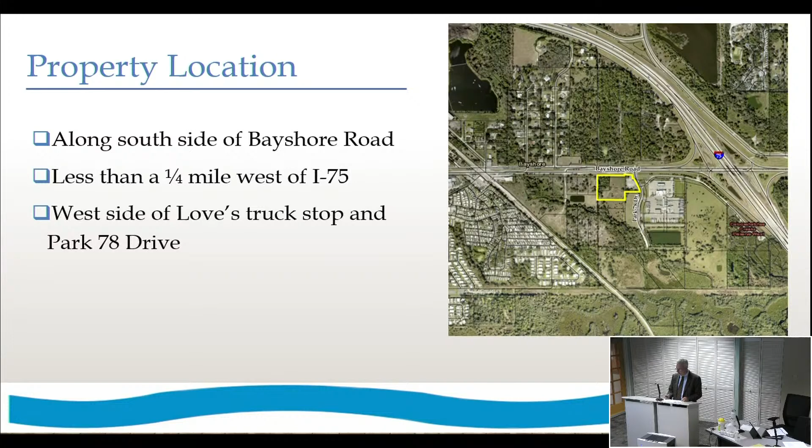So the property is located right at the southwest quadrant of I-75 and Bayshore Road, State Road 78, right here. You can see this is the big Love's truck stop, and this is the subject property. To the north here is a commercial planned development that I believe was zoned sometime around the 2010 timeframe. We did that zoning as well, and it's for all commercial development at the interchange. The property itself is 5.29 acres.

The proposal is for a convenience store with fuel pumps, similar to the use just to the east. 6,000 square foot convenience store with a total of 22 fuel pumps.

The master concept plan is fairly straightforward. The main access is here through a planned median cut of State Road 78. That would align with the access to the north. You can see there's already some sort of median cut in existence right now without any improvements. So that's how the main access would work.

It would come into the site. The main fuel canopy is to the north of the site. On the south side is a truck fueling station. In the middle is the convenience store. And then we have indigenous preserve, or indigenous restoration rather, which I'll talk about in a moment, and additional indigenous restoration planting area over there. And then we have additional dry detention on the site as well.

We do have secondary access over here to Park 78 Drive, which aligns with Love's.

The criteria for approval is listed in LDC section 34145D4. That's the criteria for approval for a plan development. I'll just run through these fairly quickly.

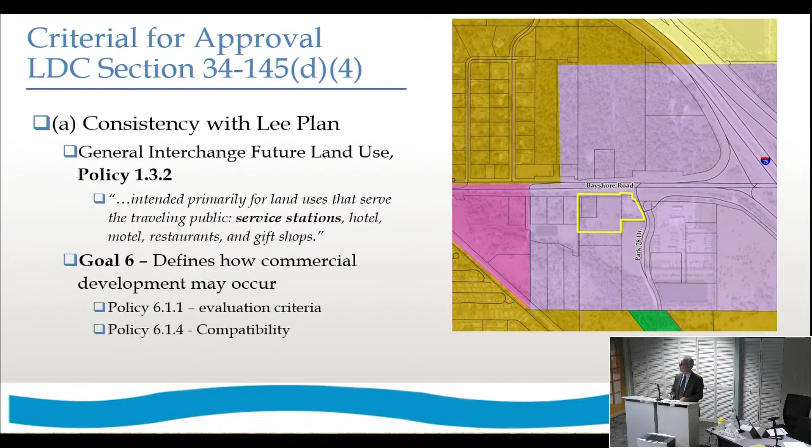And then policy 6.1.4 addresses compatibility, which is also a criteria of approval, criteria C. So you can see an aerial close-up of the subject property. On all sides, we have vacant property except to the east, which again is a like use, so clearly those two uses are compatible.

To the north, as I mentioned, is also a commercial plan development, also a compatible use, and that's across from an arterial road. And then to the west and to the south, this is vacant AG2 property. So right now it's vacant.

Criteria D is whether or not we have sufficient access. Again, we do access an arterial road right here, and then we access Park 78 Drive, which comes right out to the interchange over on our east.

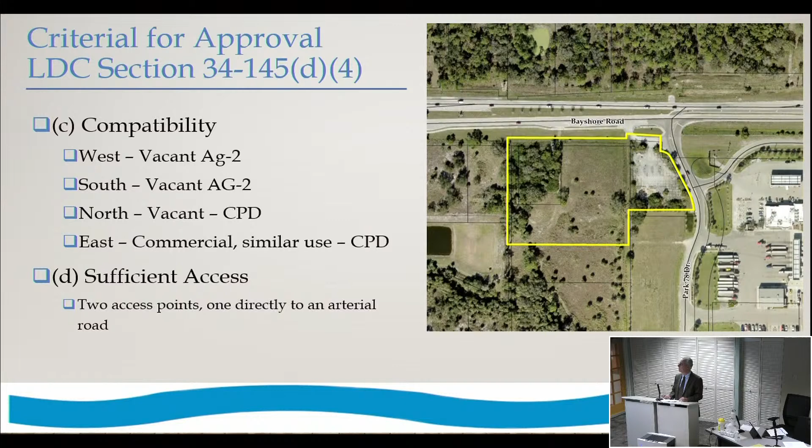Just to clarify, there's the connection points that are shown to the south and the southeast, but those are to ag lands. So is that just being shown, those arrows? Future. It's not a code requirement, cross-access, correct? That would only be required if they were commercial property.

So they're just being shown in the event that they're commercially developed? Right, because that's really a primary access location there on the western boundary. So we're kind of assuming that the other properties adjacent to us would utilize that road that we're building for future access. So that's this road, and then this is access to the properties in the south because they need some sort of access. So if you go back to...

So they'll be improved on your site with some kind of stub out or something? Is that kind of the intention? Correct, yep. Okay, that's all I wanted to clarify. You kept saying two access points. I just wanted to get clarification on those since they were shown here as connections, but they're ag zoned. Okay, yeah, exactly. Those would be access points for the properties to the south so that they're not landlocked. Exactly. Thank you.

So that's sufficient access. Criteria F, not adversely affect environmental resources. There are no environmental resources on the site. I am going to talk about this very small indigenous area that's at this location, but the site has been previously cleared. This portion was going to be developed as a gas station at one point. That's been cleared as well.

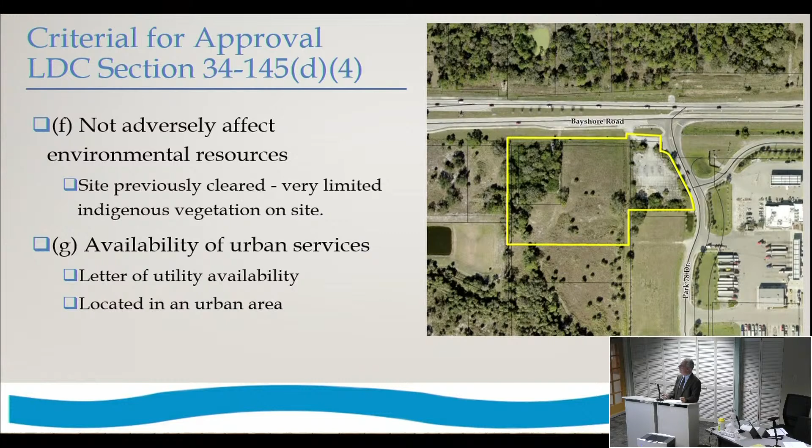Availability of urban services. We are in an urban area. We're at an interchange. There is development immediately adjacent to us, and we do have a letter of service availability from Lee County Utilities. And FGUA. Thank you. And Florida Gulf, yeah, Utility Association, I think. All right.

So going back to criteria B, we are asking for one deviation, and that is the deviation from the indigenous requirement. The code requires 20% open space, half of which needs to be indigenous preserve. There is one small, 0.33 acre indigenous area right here. As you can see on the master concept plan, this conflicts with the access point, which needs to have this alignment because of the median cut. There's not really any discretion about that because moving the access, you can't move it closer to the interchange. It's all regulated by FDOT. So, it's where we're at.

There are special criteria in the North Fort Myers Community Plan. So not only do we need to justify the deviation based on the PD requirements, which are an enhancement of the master concept plan and not otherwise negatively impact health, safety, and welfare, but also there needs to be some sort of variance criteria applied.

And in this case, there is a uniqueness about this site that causes us to need to do this. It's not just because we don't want to preserve any indigenous vegetation. It is in the location of the only place where we could have our main access. So that's the justification for the deviation.

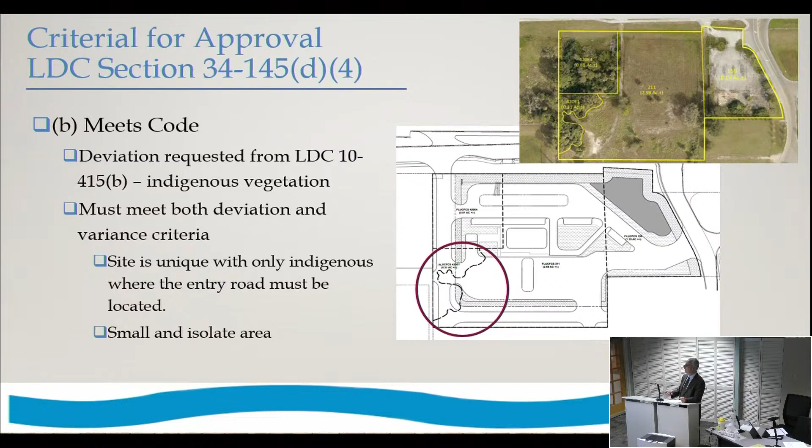As a condition of doing that, we are looking at replantings at this location, which helps with screening of the dumpster, and also to the south. If I go back to the master concept plan, it's easier to see—right here along the south, which also would enhance the buffer to adjacent future uses. So we're able to kind of turn this into a win-win, if you will.

And with that, let me turn it over to Yuri, who can talk to you about transportation. Thank you, and let me submit the PowerPoint presentation. That'll be applicant's exhibit 1.

Good afternoon. For the record, Yury Bykau with TR Transportation Consultants. I've been sworn in and previously accepted as an expert in transportation planning, and I've testified in this forum before numerous times.

Thanks. We prepared a traffic study for this application. As previously mentioned, the rezoning request is to permit a 6,000 square foot gas station with a maximum of 22 refueling positions. As part of the traffic study, we first prepared a trip generation analysis to estimate the number of trips the development would generate.

We then took those trips and added them to the surrounding roadway network in order to see if there's available capacity on SR 78 or Bayshore Road to support this development. Our link level service analysis results indicate that there is sufficient capacity on SR 78. It was shown to operate at level of service C in the future with the project traffic added to the roadway. So that's the result of the link level service analysis.

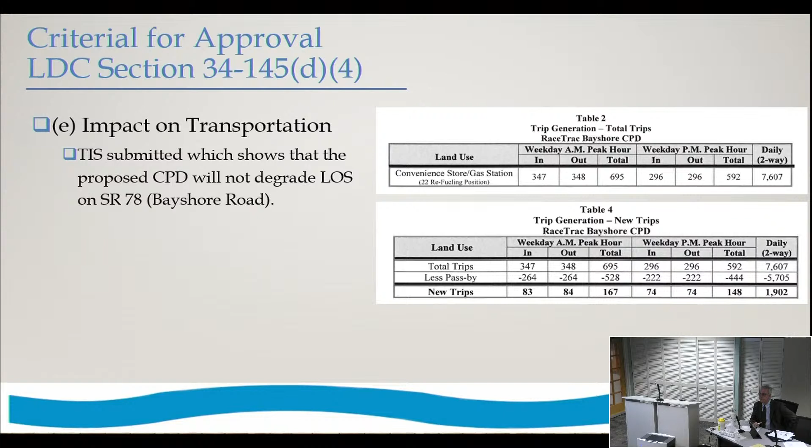The only other question I had was there was a stormwater analysis provided, I think it was attachment F. It talked about, in broad strokes, what the general stormwater management would be, but it still referenced the original master concept plan that showed the drive-through, and it had some water flow appearing to go through. I don't know if that was an access way or what opening that was. I just wanted to be sure we had testimony that the revised master concept plan isn't going to negatively impact that.

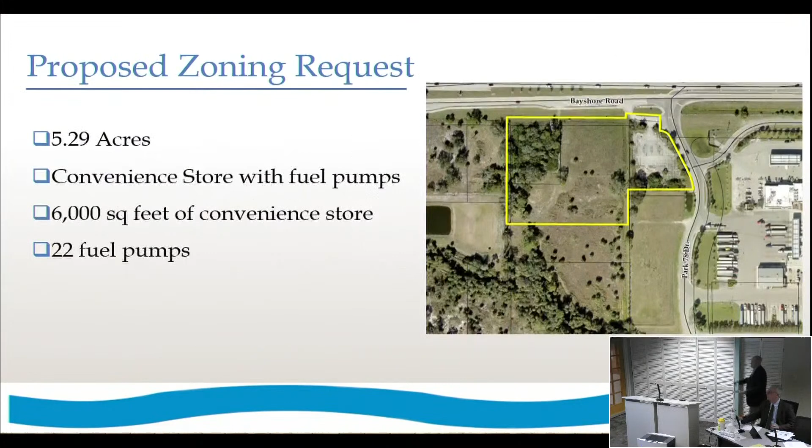Might also want to point out where the drive-through was and is no longer. There originally was a drive-through proposed in this general area, where you'd enter, use the drive window, loop around adjacent to the store, and exit. There were discussions with transportation staff at the county as to whether that would increase trip generation. Rather than argue about that, Racetrac has moved away from that concept, so we've deleted the drive-through. That opened this area up for additional open water management instead of possibly underground storage, but it doesn't change the stormwater analysis. The system would operate the same, and the general flow of the property is from north to south, so we'd still discharge to the south at the same location.

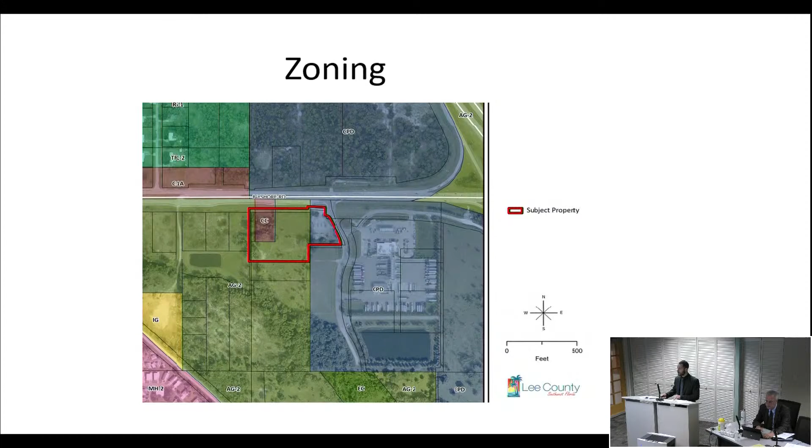The general basis for staff's recommendation is that the proposed uses are customary in interchange areas, appropriate contextually, and satisfy the rezoning criteria. The subject property, delineated in red, is currently divided into 3 zoning districts: community commercial (CC), agricultural (AG2), shown in green, and commercial plan development (CPD). The 5.29 acre property and surrounding area are located in the general interchange future land use category. The Lee Plan interchange areas are special areas adjacent to Interstate 75 that maximize critical access points. General interchange areas are intended primarily for land uses serving the traveling public, encouraging uses such as service stations, hotels, motels, restaurants, and gift shops, per Lee Plan Policy 1.3.2. As proposed, the convenience food and beverage store with fuel pumps is consistent with this policy, especially meeting vehicular demands of the interstate interchange area without causing transportation deficiencies or detriment to the public.

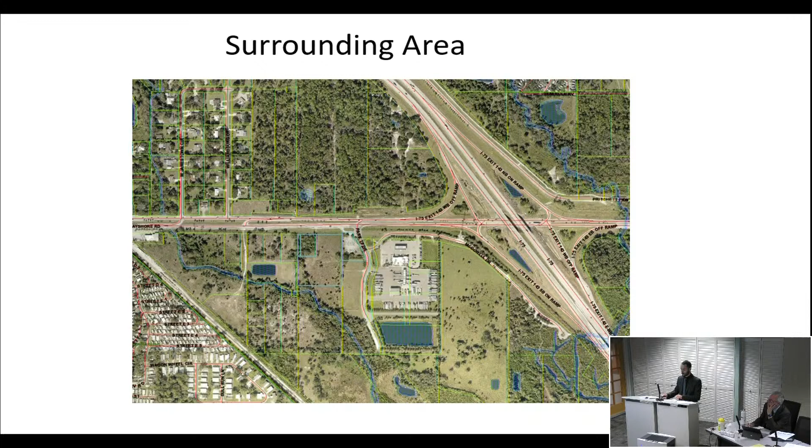The applicant touched on surrounding land uses; I'll go over them again. To the north across Bayshore is the North River Plaza Commercial Plan Development, about 41.6 acres, currently vacant, approved in 2010 for 260,000 square feet of commercial uses and a 180 unit hotel. To the east is the Bayshore I-75 Land Trust Commercial Plan Development, approved for 130,000 square feet of commercial uses and a 182 unit hotel on 25.69 acres. A significant portion is developed with the Love's Travel Stop, 1.43 acres of which is part of this request, so we'll discuss removing that from this PD. It was formerly developed with a Racetrac convenience store and gas station, removed in the 2000s. To the south across Bayshore Creek, and to the west, is vacant agricultural land, also in the general interchange future land use category.

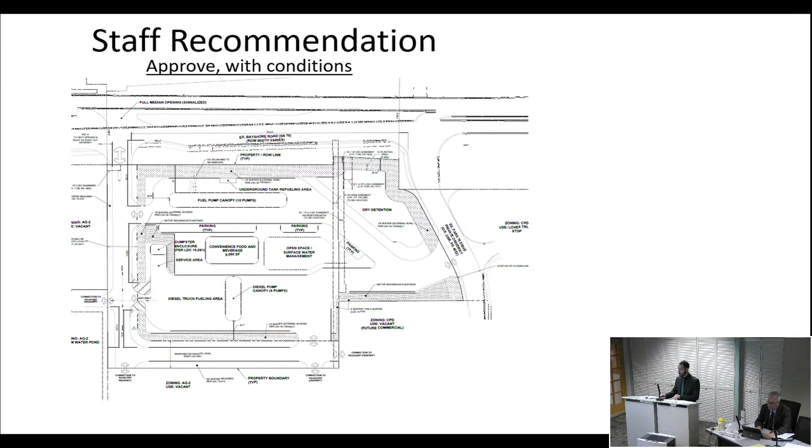Staff's recommendation of approval with conditions is supported by evidence that the property is adequately served by public services, including roadways, utilities, potable water and sewer systems. The project is consistent with the Lee Plan, analyzed against Policy 1.3.2 on general interchange areas, Objectives 2.1 and 2.2 on development timing, Standards 4.1.1 and 4.1.2 on water and sewer, Goal 6 on commercial land uses, and Goal 30, the North Fort Myers Community Plan establishing commercial corridor provisions. This project is consistent with those provisions, including the requirement to meet variance criteria for certain deviations, even through a plan development approval. The project complies with applicable Land Development Code provisions, including supplemental use and design regulations for the community plan area and the desired land use of a convenience food and beverage store. It is compatible with existing and planned surrounding uses and poses no detriment to environmentally critical areas or natural resources. Access and transportation impacts will be sufficiently addressed at time of local development order, and the proposed use is appropriate at the proposed location.

The recommended conditions here—I have to note these are carryover from a previous slide, so please ignore those.

Condition 3 is relative to the open space for the project, aligning with staff's recommendation on the indigenous open space deviation. Condition 4 requires the applicable portion of the Bayshore I-75 Land Trust Commercial Plan Development be amended prior to local development order approval to reflect the 1.43 acre departure from the project acreages and intensity.

Can this be done administratively? It can, yes. This can be pursued administratively, as other similar requests have been granted administratively. The threshold is simply to not intensify, and for subtracting, there's certainly an avenue that can be done administratively.

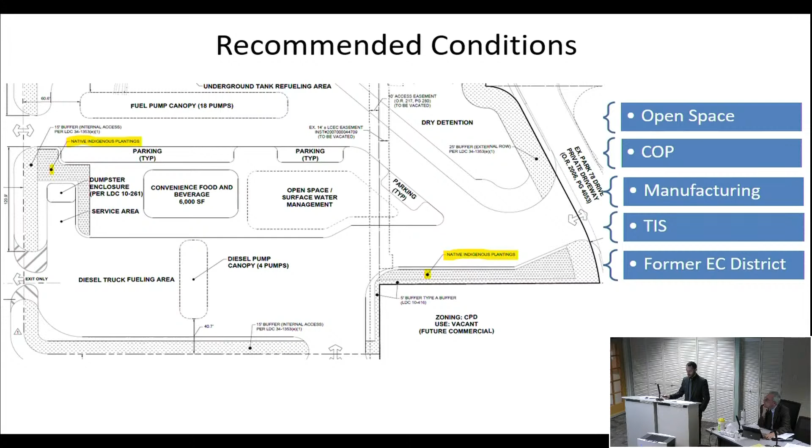With respect to the applicant's 48-hour letter, staff and the applicant are in general agreement. Two items that had their fair share of attention in the staff report were the drive-through, which has since been removed—you can see here where it was originally—and the open space deviation, because of the requirement to not only address the deviation criteria but the variance criteria in the Land Development Code.

The only deviation was from 10-415B, the open space requirement. It pertains to large developments, defined as 10 acres or more, or 2 acres or more of impervious surface. This project meets the 2 acres or more impervious threshold to be considered a large project, so they must provide 50% of their open space requirement through on-site preservation of existing native vegetative communities.

As indicated in the applicant's environmental report, the only applicable area would be the 0.31 acres demonstrated here on the FLUCFCS code 420E1, which is right here, where we were showing on that overlay—the road going through it.

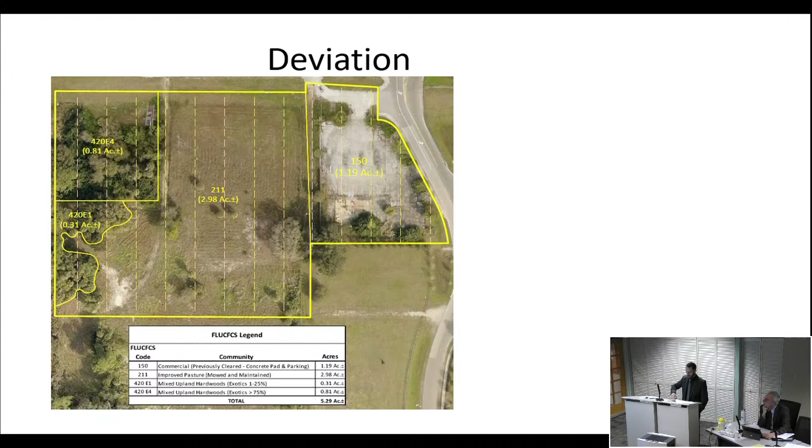This would impair the cross-access connectivity and the access location, and staff finds that the property does have inherent property-specific conditions given the location and size. The ideal location for access and cross-access follows this western boundary of the project.

Staff believes the variance is the minimum variance requested, as conditioned, with supplemental native indigenous plantings depicted on the master concept plan. I have provided a minor revision to the condition language associated with this deviation to ensure it captures both native indigenous planting areas on the master concept plan. The original language only referenced the southeast, but just west of the convenience store there's a significant portion too of those committed plantings.

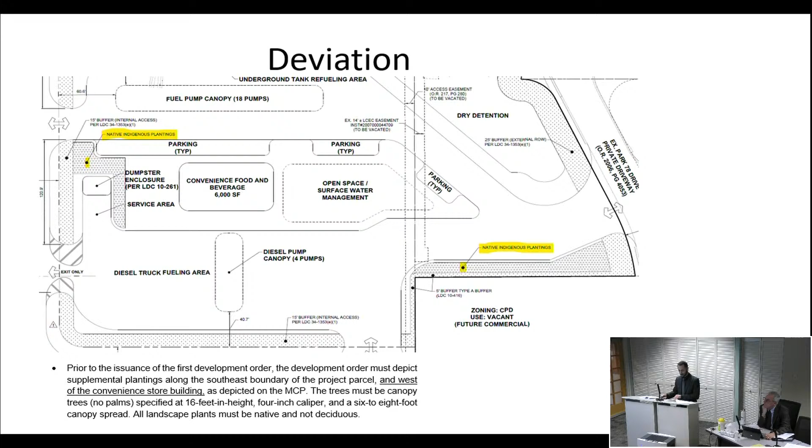With that summary of staff's recommendation of CPD approval with conditions, my presentation is complete, and I'd like to make myself available for any questions you may have.

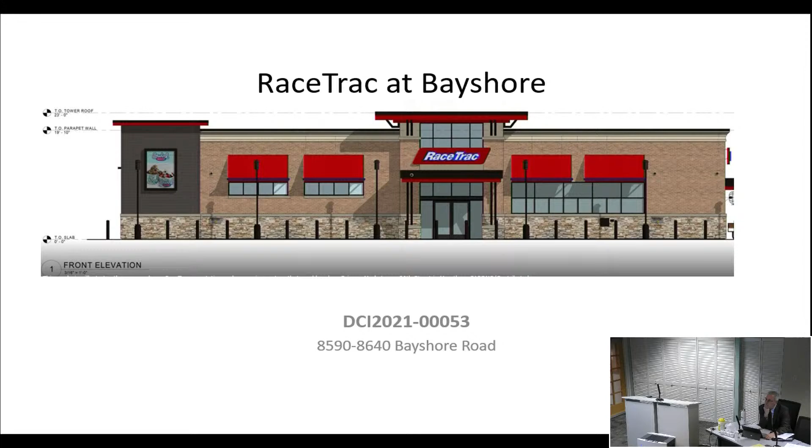That was quick. I did have one other housekeeping question, regarding the LCEC and access easements that are shown on the master concept plan to be vacated. I just wanted to know where that is in the process—have they been applied for, and do we have a timing indication if that would be done before the DO?

For the record, again, John Voidock with Lacey Fitzgerald. We have not—basically we would coordinate that in conjunction with the new service for the project, kind of coinciding with the development order process. Okay, so that has not been initiated yet. So the DO has not been applied for at this point? That's correct. Okay, thank you.